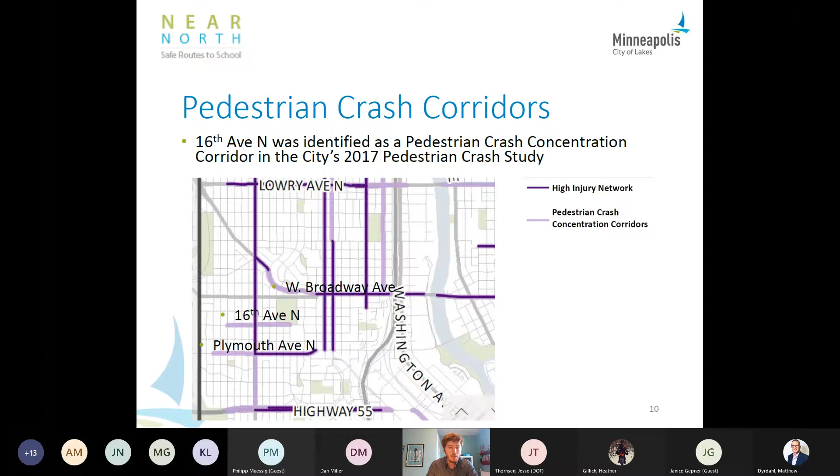It's also our pedestrian crash concentration corridor, defined as such in the city's 2017 ped crash study. The portion to the west of Commons Park, North Commons Park, is generally indicated as a pedestrian crash corridor. For the last available 5 years of data, we see 4 pedestrian crashes, 1 bicycle crash, and 47 motor vehicle crashes in that same study period.

I'm just taking a little bit of time here to go through our Bicycle Boulevard toolkit. Bicycle boulevards are traditionally streets shared with motor vehicles, sometimes with parking on both sides, like our traditional residential streets, but with traffic calming devices to help improve the corridor for bikeability.

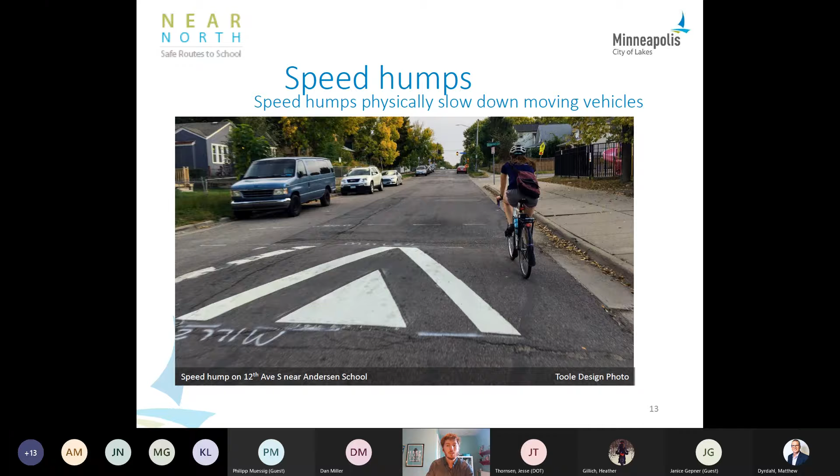Some of those traffic calming devices are like speed humps, which slow down traffic to our designated 20-mile-an-hour speeds in the city, and traffic circles, which tend to slow down vehicles at the intersections themselves.

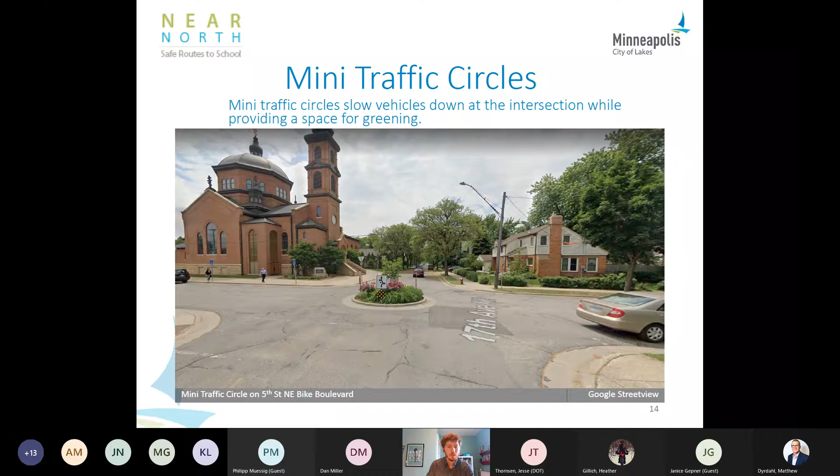Chicanes could be possible, either painted or curb raised chicanes.

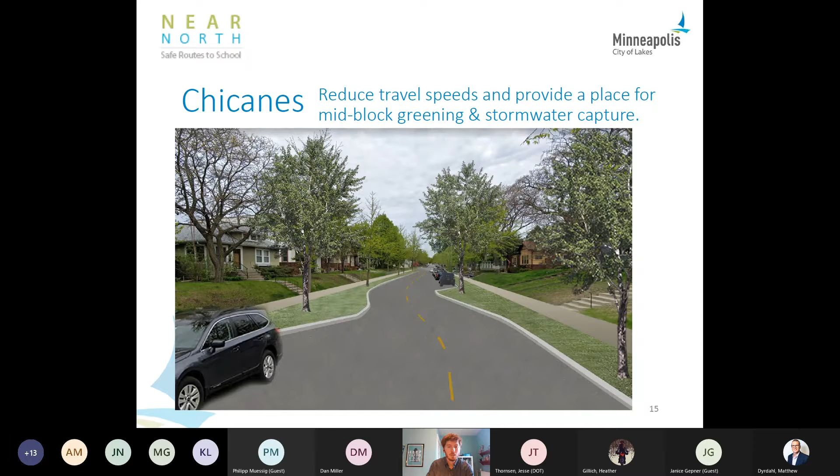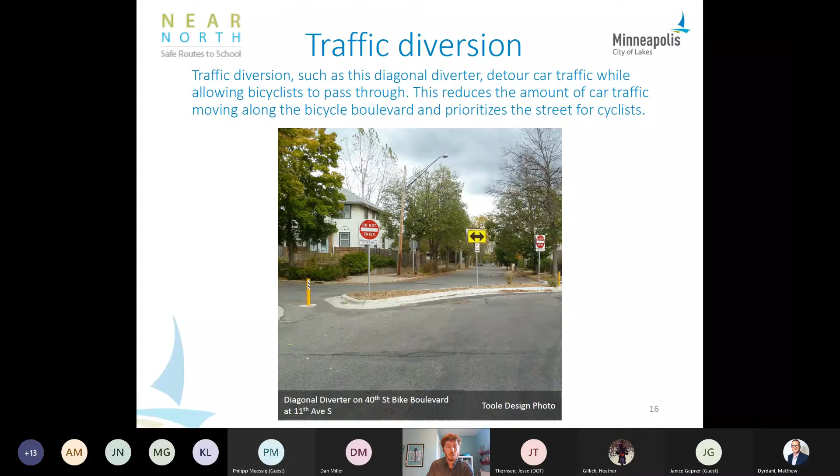Traffic diversion, like you see here, would physically move traffic off of using this street and allow bicyclists to pass through. And then at our major streets, we might have things such as shelter medians or rapid flash beacons to help cyclists and pedestrians across those major street gaps.

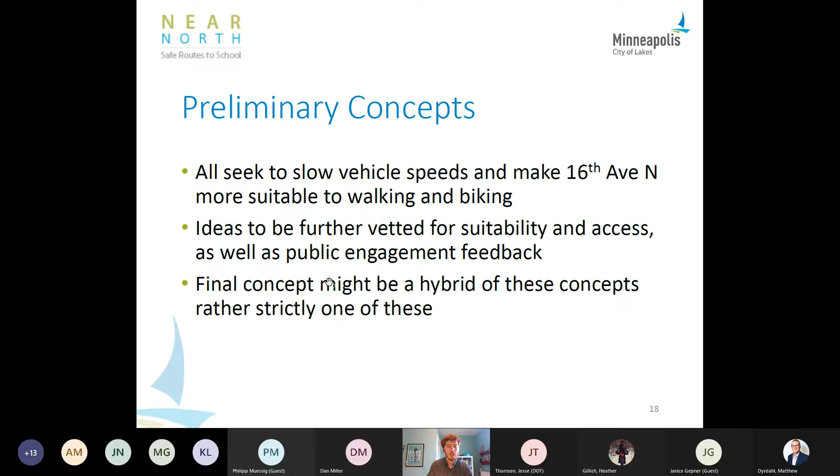And now here's the meat of the matter for today. We'll go over the preliminary concepts—we have 3 of them. All seek to slow vehicle speeds and make 16th Avenue North more suitable to walking and biking, though the ideas will be further vetted for suitability and access, as well as public engagement feedback from our open house coming up on the 24th. The final concept later this spring might be a hybrid of these 3 concepts.

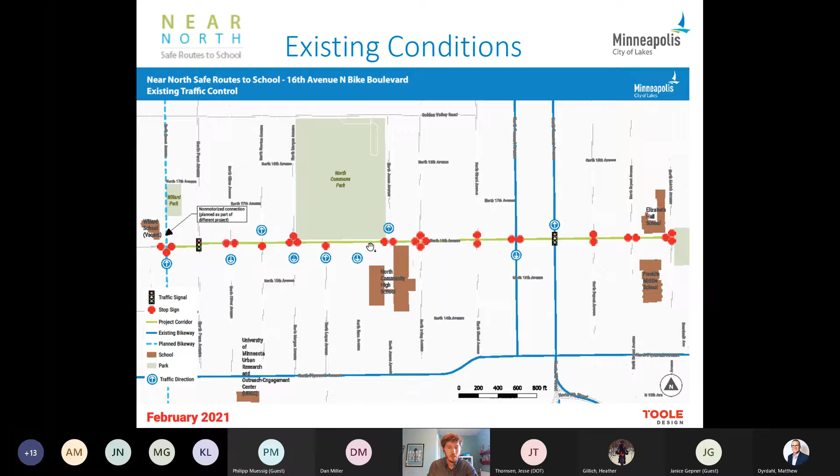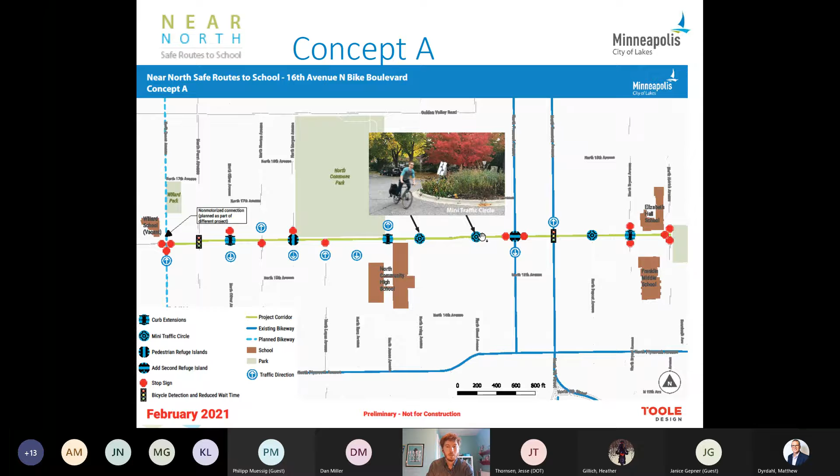So this is just standard items out of our toolkit, traditionally looking towards items that deflect speeds from the corridor.

The second concept, B, uses a lot more speed humps in the mix, centered on North Commons Park and North High School, which is where the street is most wide open and there's less parking demand. We also use mini traffic circles and curb extensions like in concept A, and add a rapid flash beacon at Fremont Avenue to help students cross, since it's a 1-lane southbound street that could use a better device there.

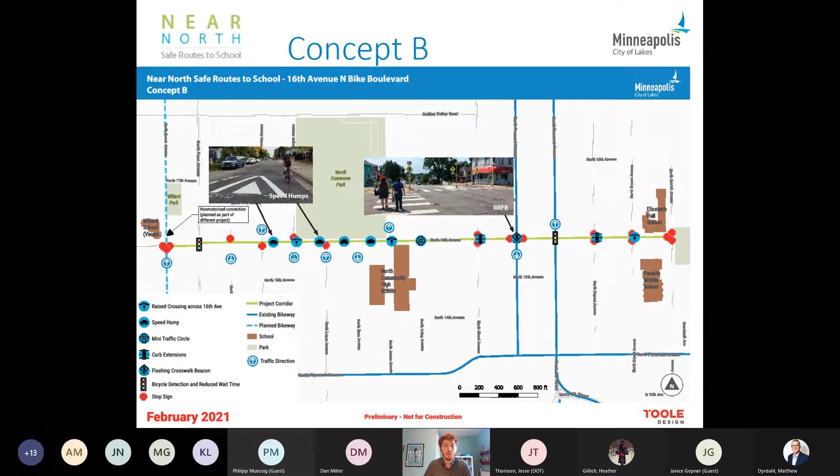Concept C takes from the other two, mixing curb extensions and mini traffic circles, and also adds a traffic diversion between North Commons Park and North High that would physically divert vehicles off of 16th Avenue. We don't have exact numbers on the amount of vehicles using the street, but we do think it's an advantage to decrease the volume for the bike boulevard.

The traffic diversion would look much like an off-street trail in this area—a curb raised trail between Knox and James.

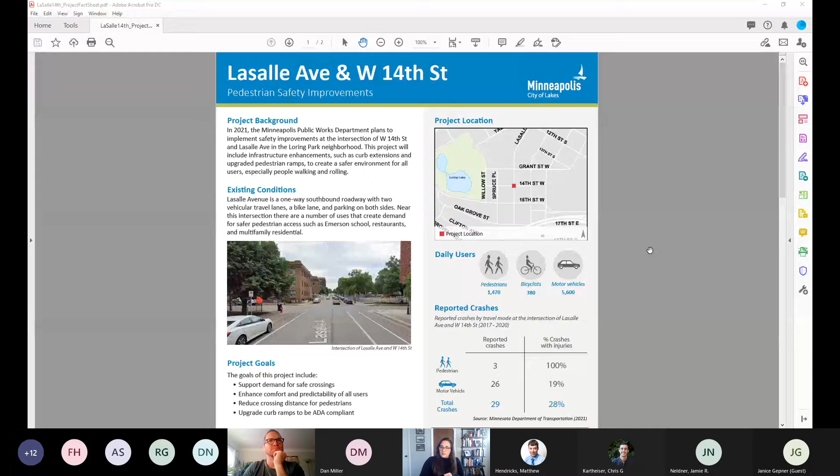So you have a lot of uses that create a lot of pedestrian activity. If you look on the right-hand side here, this intersection alone gets about 1,500 pedestrians every day. You have a number of cyclists, just about 400 cyclists every day here, as well as a significant amount of motor vehicles.

This intersection, we've heard from the council office as well as community members, a lot of concerns about safety, particularly at this intersection. I think the biggest thing we've heard is in terms of sightlines, a lot of challenges there. This has been an ongoing safety concern for a while - back in 2018, we actually pulled the parking back from the intersection to improve those sightlines, which did help, but of course, more needs to be done.

Quickly looking at the crash data, over the last 3 years, there's been a total of 29 crashes at this intersection alone, over a quarter of which have resulted in injury. So we know that making safety improvements here is a really big priority, both for the city as well as for the community.

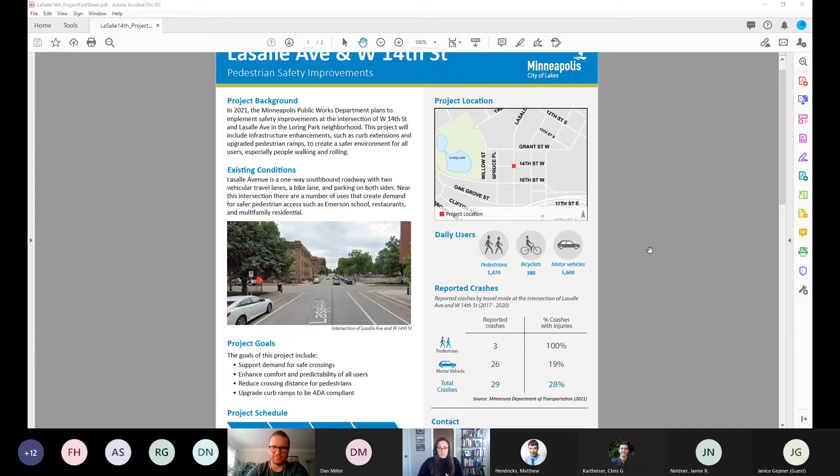So the goals of this project, as I mentioned, are to increase the overall safety and comfort of this intersection for all users, support the demand for safe crossings, reduce that crossing distance for pedestrians, and upgrade the curb ramps to be ADA compliant as well.

As I initially mentioned, this project had the opportunity to move up in the CIP, so we are on a pretty quick timeline. We are in the early stages of data collection and concept development, going out to the public this week and in the coming weeks. The goal is to have a 30% concept developed in the next month or so, with the hope that we can implement late summer or fall in order to get it done in 2021.

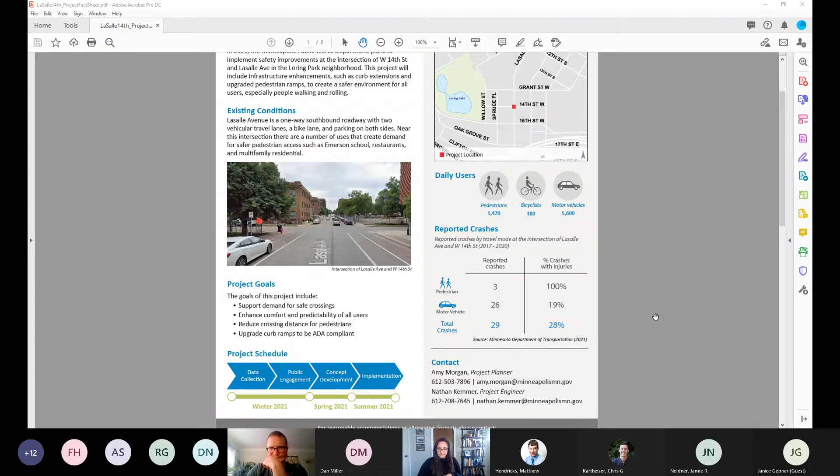So briefly, we can look at what our early concepts are proposing. You can see here the existing conditions. It's about 40 feet curb to curb on LaSalle. As I mentioned, 2 travel lanes, a bike lane, and 2 parking lanes there.

The goal of this project would be to include curb extensions at each of these corners. These would range from 5 feet to 7 feet, depending on some of the technical analysis we are doing. With this, we would also be upgrading the pedestrian ramps to be ADA compliant. Lastly, with this intersection, there are a number of catch basins, so we are looking at potential opportunities for green infrastructure at this intersection.

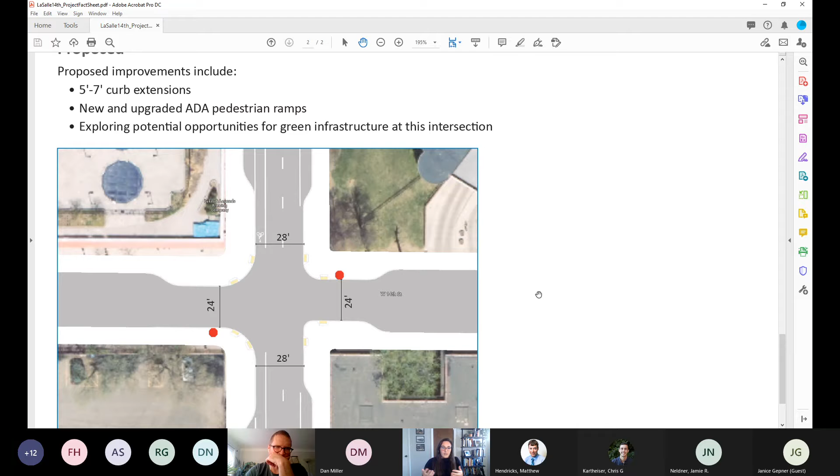Although there are no bike elements per se in this project, it does align with an existing bike lane, which will not be impacted by this project. So I can end there and open it up for any questions or comments people might have.

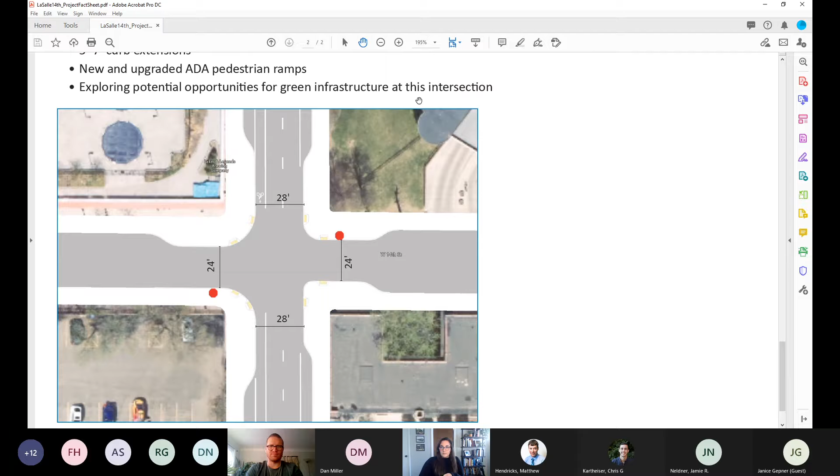Amy, this is Dan Miller. Is the bike lane there a 5-foot bike lane? 6 feet currently. Okay, thank you.

One thought I had when looking at this earlier today - I usually travel on 15th, so I'm not real familiar with this particular intersection, but I don't know what type of cross traffic goes across this. It seems that cars may line up here, having to cross at a bit of an angle, looking at your built-out drawings, and that might mean they've got to navigate within their 12-foot lane while traffic is coming up on them. It's just an observation, that's all.

Yeah, to clarify, are you talking about crossing, like if you're on 14th crossing LaSalle? Yes. So that's something we are still looking at, making sure the taper across the intersection isn't too great. We are making sure it's in line with what we typically do.

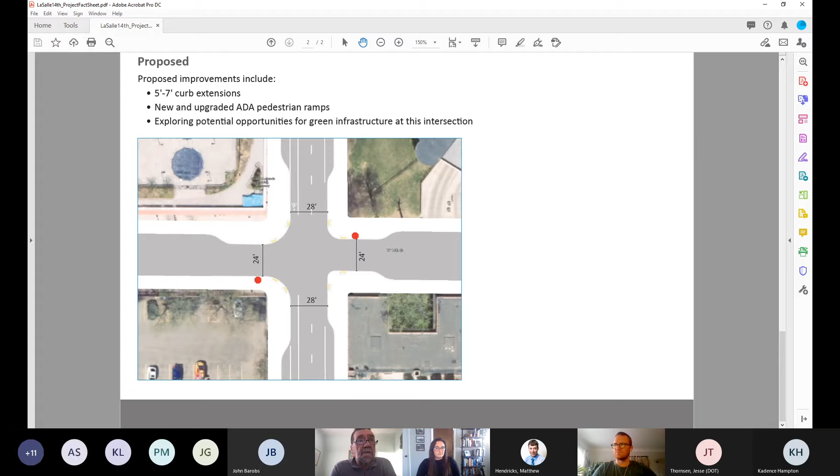Okay, so now getting back to—that's it for our presentations today. I think I'd like to open it up to announcements or comments. I believe that Jesse had something he may want to share with us. Jesse?

Sure, and it would probably be helpful, granted the position I'm in, if you could help present this and bring it up to the group. But it came to my attention—part of my role at MnDOT is doing development reviews, so whenever a development happens along one of our corridors, I get to tell them how awesome they're doing it on ped and bike infrastructure. And awesome is sarcastic. One that came to my attention recently was the South Maintenance Facility along Hiawatha and 28th. I think it'd be best, Dan, since you have a lot more background on this sort of facility than I do, but it did come to my attention, and I thought it would be great to bring it up because there are some bike lane options being pondered.